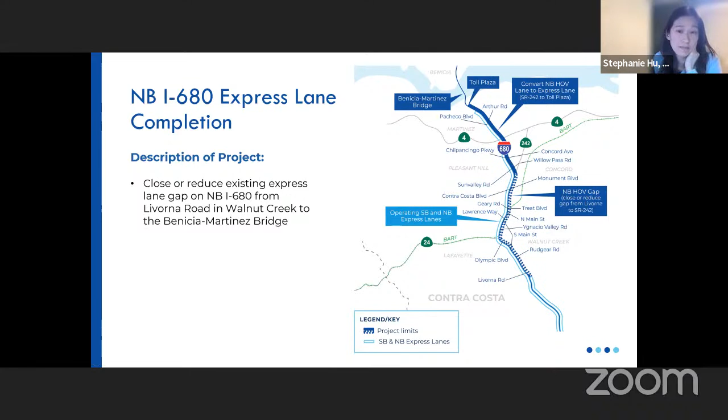Currently the project is in the environmental clearance phase. The purpose of the project is to reduce congestion and delay on 680 northbound during peak periods, improve travel time reliability along the corridor, encourage users to use the HOV lane and transit, optimize the use of existing HOV lane capacity, and provide efficient travel options for vehicles, both carpool and non-carpool.

The project aims to address the need for congestion relief, where delays can often reach up to 30 minutes in the PM peak period while traveling from one end of the county to another. The project also addresses the gap we currently have in the managed lane or express lane system. Lastly, it addresses operational deficiencies on the corridor, such as weaving issues in the area around Lawrence and Treat, which regularly cause backups to the 24 interchange.

I'm going to provide an overview of our alternatives, but before we dive in, I wanted to highlight a few key design features or elements of the proposed project as shown on the slide. Each of the alternatives I'll go over will have some combination of these design features.

The first design element is the realignment of southbound 680 in the vicinity of the 680 and SR 24 interchange. In the Ignacio Valley Boulevard area, there is a BART structure that goes over 680 with columns on the roadway. This structure and its columns have always presented a challenge for fitting in a continuous northbound express lane through that area, and the realignment of southbound 680 is a solution to that challenge. The second feature is this existing HOV conversion to express lane.

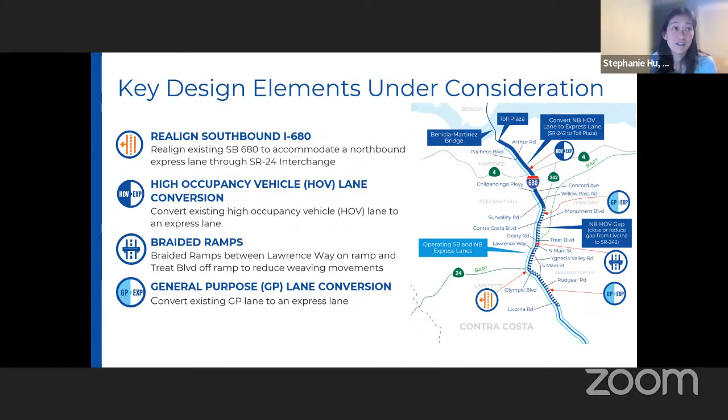The fourth key element is the general purpose lane conversion, which converts an existing general purpose lane to an express lane. We're currently studying four build alternatives, and each has some combination of the key features we just went over.

Alt 1C is the close express lane gap alternative. This alternative includes realignment of the southbound 680 roadway in order to fit in that continuous northbound express lane through the 680-24 interchange and through the area of the BART structure. This alternative, and all build alternatives, include converting the existing HOV lane between 242 and the toll plaza, shown in that dark blue line up top. That blue dotted or solid line is common to all alternatives.

Alt 2 is the reduce the gap alternative with braided ramps. This alternative does not totally complete the express lane system in the northbound direction; it actually leaves a gap in the vicinity of the 680-24 interchange. This alternative includes the operational improvements of the braided ramps at Lawrence and Treat.

Alt 3 is essentially alternative 1C plus alternative 2, closing the gap with braided ramps. Alt 5 proposes to reduce the express lane gap by converting a general purpose lane to an express lane, and also includes the braided ramp element.

Lastly, there is a no-build alternative as part of our required study, meaning we would maintain the existing conditions. If you're wondering why there's no Alt 4, or why the numbering seems funky, it's because we eliminated some alternatives that are no longer viable, which is why there's some skipping of numbers.

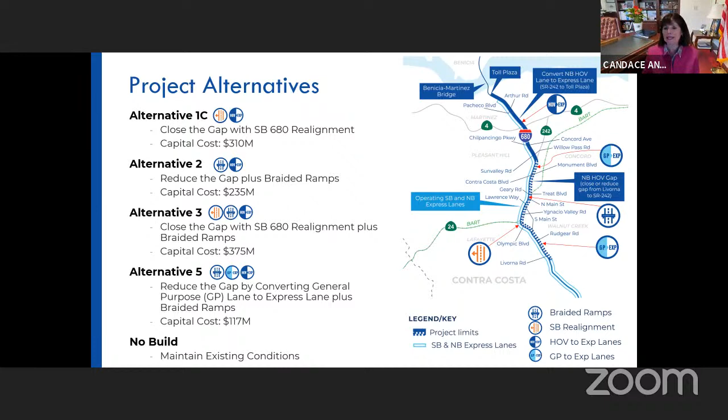Okay, so I'm going to give a short snippet of each alternative. I know we talked a lot about the overall picture, but I'm hoping to go one by one to give you a better understanding of each at a high level.

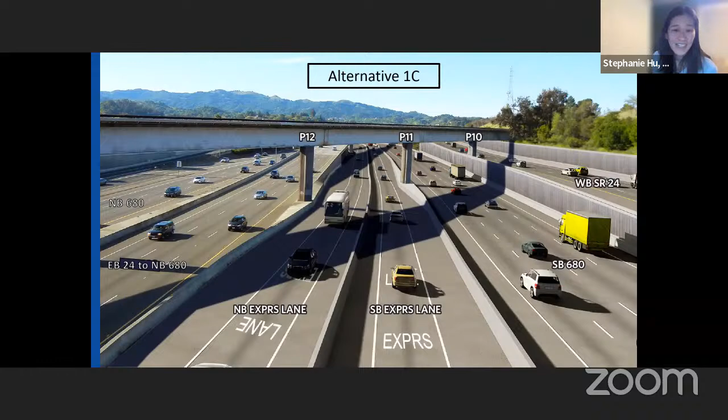Existing and 1C. So if there is another visual aid here with a simulation, I'm hoping to show to convey what we're trying to do here in this alternative.

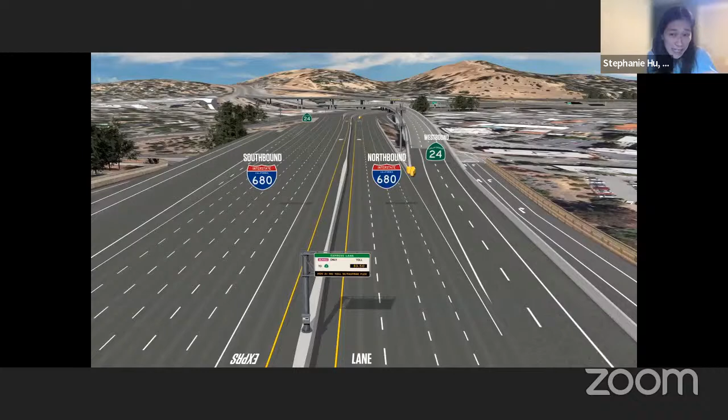The simulation will begin by flying down onto northbound 680 near the westbound 24 off-ramp. It shows us in the driver's seat. The new express lanes will start shifting to the left, but we'll continue on this express lane, and it kind of exits.

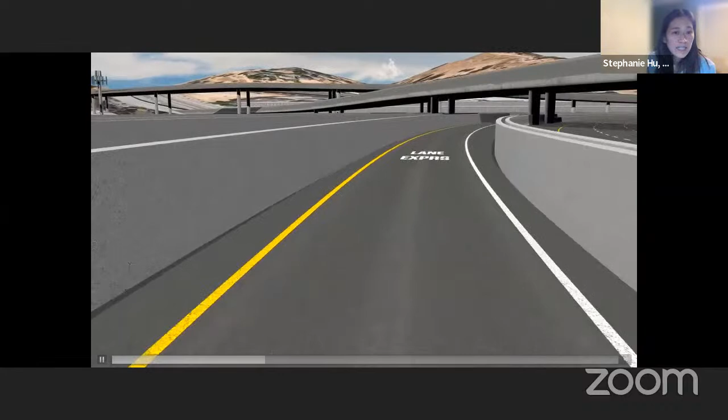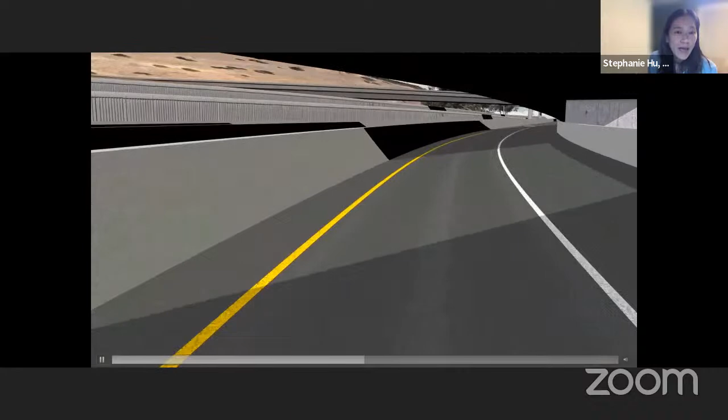We will soon drive underneath, going under the existing westbound 24 flyover structure. We also drive under the eastbound 24 Ignacio Valley Boulevard off-ramp and this merge of eastbound 24.

On our left here, we'll look over - that is the southbound express lane next to us. Soon this camera view will turn 180 degrees, and you'll see the southbound 680 roadway, westbound 24, and then we're looking towards the south again.

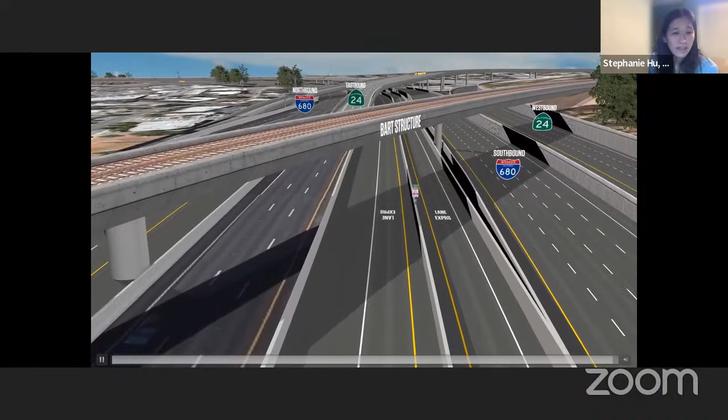So that's Alt 1 in the 24 interchange area.

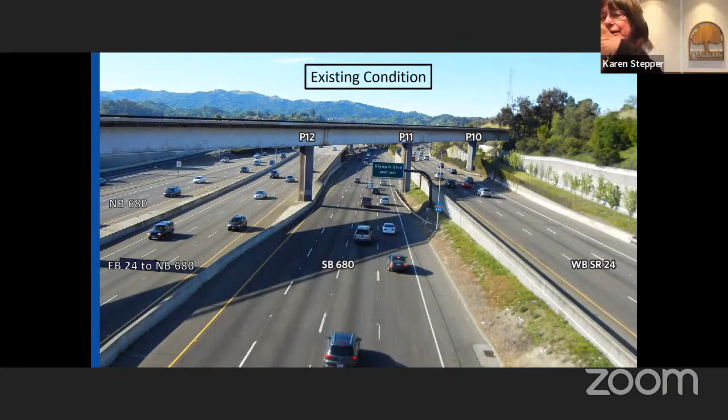Stephanie, can you talk about the exits? Have you changed the exit from North Main? When you come northbound on 680 and you go right towards the main road, you can get off at North Main Street - is that still there?

So yeah, where it kind of shifts is where Ignacio Valley Road is. North of Ignacio Valley, the exits shouldn't change.

And the other question I had is that tiny little yellow part - does that mean widening? Yeah, just taking over to the right-hand side to create room for the lanes.

So people will either get off there at 24 or they'll just keep going. The lane the way you exit remains the same - it's just that we needed to create a little widening to accommodate the space needed.

Thank you. Stephanie, where does the express lane - where do you get on it and where do you get off it? What exits are you not able to get off of if you get on the express lane? You're talking about buffers, I'm assuming, like where the buffers are?

So if you get in that express lane you were showing us, obviously it would be pretty hard to get off at some of these exits. Correct, yeah. So which exits do you have to - can you not get off of, if you get onto the express lane?

Will you be stuck? Well, I'm likely assuming I'm not able to get off in Pleasant Hill anywhere. Yeah, well, I think that's something we need to look at.

Buffers are not finalized. Generally that is done during the PS&E phase where we work with MTC, because there's also pricing and tolling that goes along with that. So I can't unfortunately give you the extent, like from here to here, that's when you can get in or out. That's still to be worked out.

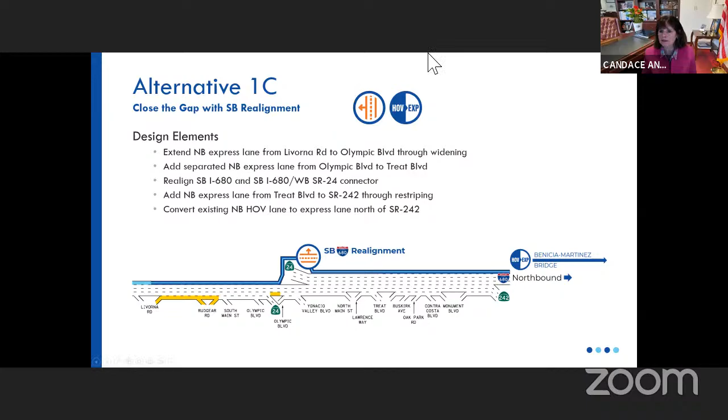Raquel, I see your hand up as a member of the public. Did you have a question about this proposal? Yeah, I'm not sure if it was left from - or is it left over from her original question? Yeah, I felt like it was there on the corner of my screen. Oh, no, yes, I do have a question - I took her hand. Yeah, I lowered her hand, but I just unmuted her.

Oh, okay, thank you. As to that proposal, it just looks like it's taking more space just to accommodate some express lanes. I want to know if there has been a study for the end user on how they feel and their experience with these express lanes, because I commute all the time and I talk to commuters and they hate the express lanes, because it's accommodating one express lane for a few people and congesting the other lanes.

And this proposal on the lane to veer off to 24, you're having two express lanes with a wide range to get the buffers and the side strips where you can accommodate two other lanes that are not express. It just feels like a long stretch of wasted space just to put in that express lane. I don't agree with it.

I think it needs more study. I think we really need the end user, the taxpayers who are actually paying out of their hard-earned money to pay for the roads. I think we need something more efficient. I want to know how, as a resident, I can discuss this with my neighbors and people who actually use these roads, so that they're the ones who are going to benefit or suffer from these consequences that are very permanent.

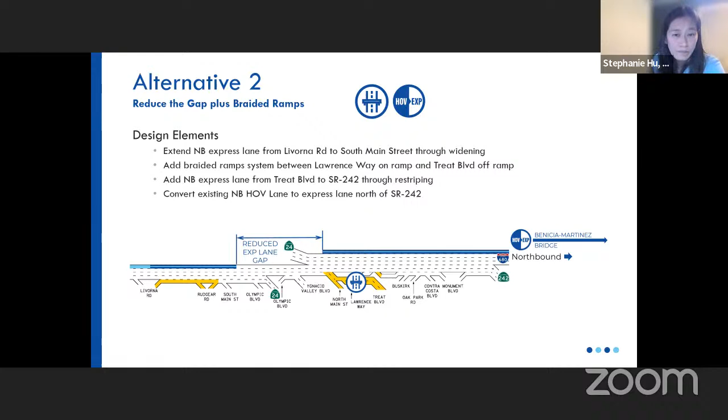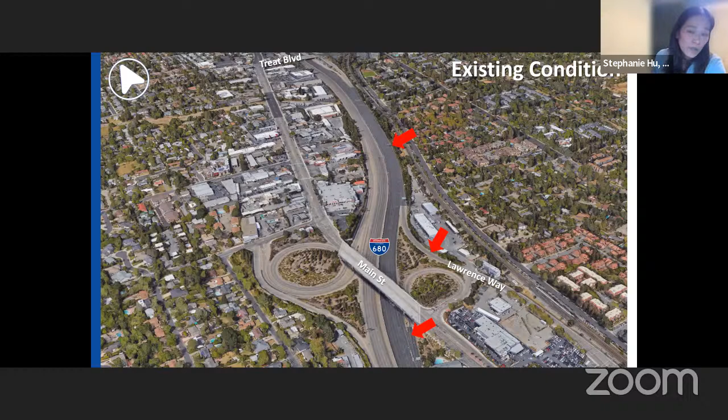And there is a visual of what the situation looks like right now. This is the Lawrence and Treat area, and we're looking north. This is the North Main Street loop off ramp that currently exists. The ramp here is the Lawrence Way on-ramp. And this is that weaving bottleneck area where vehicles are exiting to Treat and mixing with those trying to get on 680. That's the weaving area that we're trying to address.

And now there's a simulation of how that looks. So we're looking north, and this is North Main Street over 680, and Lawrence Way is on our right. Different from the existing condition, those wanting to exit Treat will exit at North Main on this loop ramp. Cars wanting to go to North Main will stay on that loop. But those wanting to go to Treat will go straight on this ramp, which is elevated in order to have Lawrence go underneath Treat, thereby separating those movements. Those exiting Lawrence won't be joining or weaving with those trying to exit at Treat. So this is the braided ramps that I was trying to convey in words, but hopefully this is more clear.

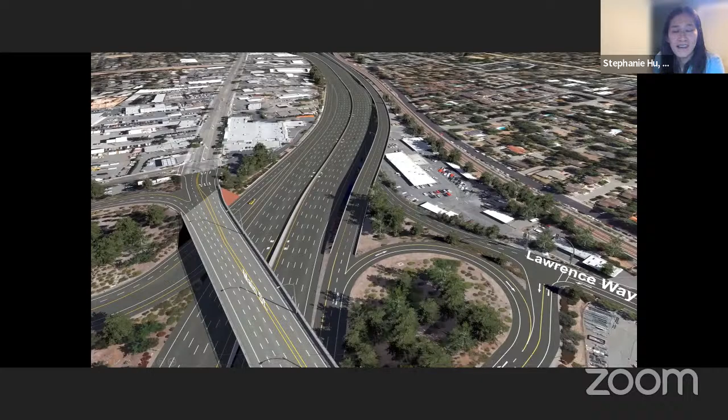Committee member Stepper: Yeah, these are very helpful, Stephanie. Thank you, hopefully, I know it was a lot in words earlier. So this is the operational improvement I was talking about to really alleviate this weaving movement and the bottleneck issue that is currently going on in this area, which often spills back to 24 and even further back.

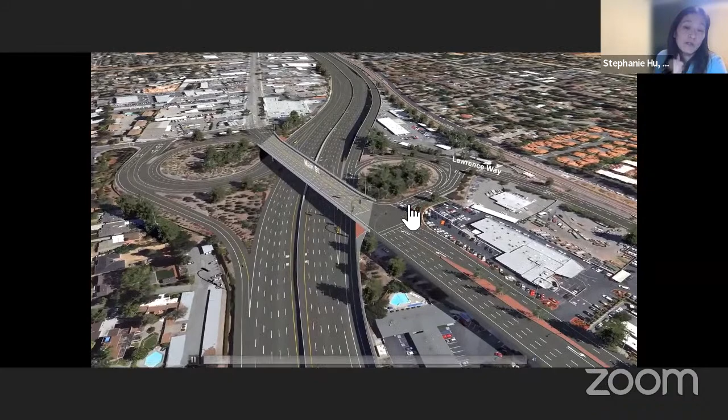So Alt 3 is basically Alt 1 plus Alt 2 together. It closes the gap with that southbound realignment we talked about. It has the braided ramps in Treat and Lawrence. And then north of 242 is when you convert the HOV to express.

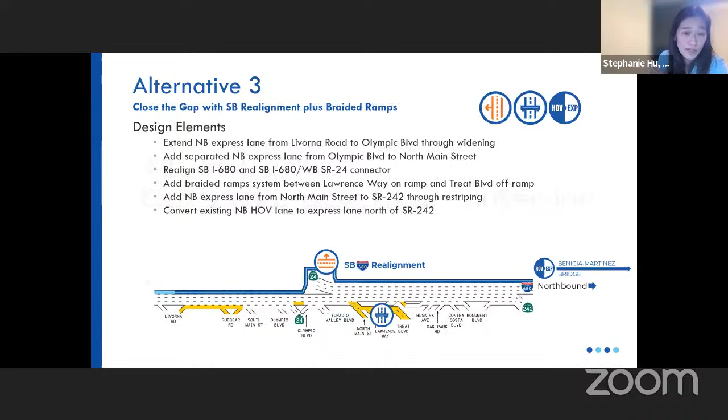The fourth build alternative, or the last one, is Alt 5, which includes taking a general purpose lane and converting it to an express lane. Here's that strip map again.

Alt 5 reduces the gap with the express lane installed through the conversion of existing general purpose lane. So first, instead of from Livorna to South Main, instead of widening, we will convert the general purpose lane to an express lane from Livorna to about South Main. We'll leave a gap between South Main to about North Main.

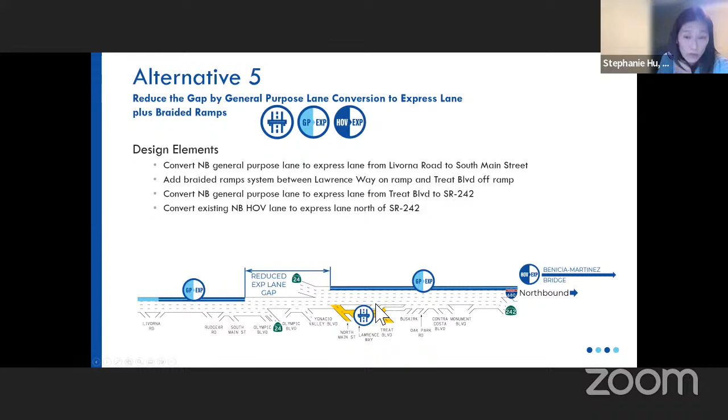And then this alternative has that operational improvement feature of the braided ramps at Lawrence and Treat. And then from Treat to 242, we would have a new express lane, but that would be through converting an existing general purpose lane. And north of 242 is the same as the other alternatives.

So here's a summary of all the alternatives stacked together with all the maps. So 1C closes the gap with southbound realignment. Alt 2 reduces the gap with the braided ramps. Alt 3 is basically 1 and 2 combined, closing the gap with braided ramps.

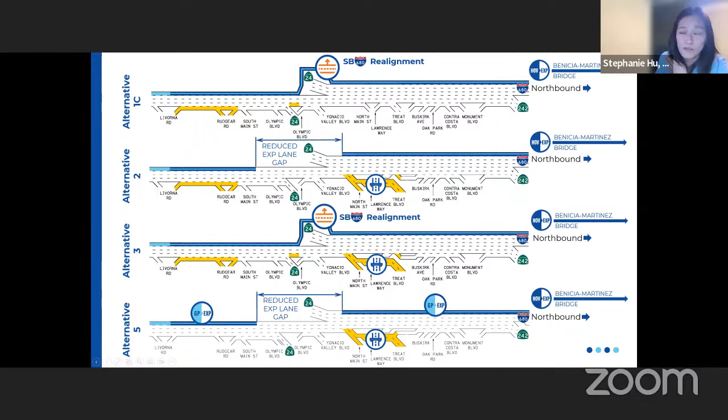Alt 5 reduces the gap, but really by converting GP lanes, or general purpose lane, in various segments, and also it has the braided ramps. And then again, all four alternatives are the same north of 242, converting that existing HOV to express.

Here's a summary of the capital costs for all the alternatives, which ranges from 117 million to 375 million. The least expensive being Alt 5 because it has fewer elements, really, because we're converting existing general purpose lanes. Alt 3 is the most expensive, which closes the gap and also has the braided ramps.

Maybe I'll pause here to take some questions. Why don't we pause here just to see if there's any more before we jump into our vehicle miles traveled discussion. Does anyone have any questions about what's been presented, the capital cost?

You're not asking us to choose which one we like best tonight. You're just showing where we're going and what we're studying. Okay, I am not seeing any. Oh, Karen, you've got your hand up. Yes. I'm sorry, I can't even see myself on my own screen the way this. Well, we can see you, so that's good.

So it's just that I do have concerns with the last alternative, which is taking more lane and converting it, because it's going to affect the number of exits. But I mean, we're going to see more in the future about this issue. But whereas the first three did a lot of good things that I could see. So I'm not picking one. I'm just telling you the last one, where we're converting, is also compounding sometimes the resistance to what we're doing.

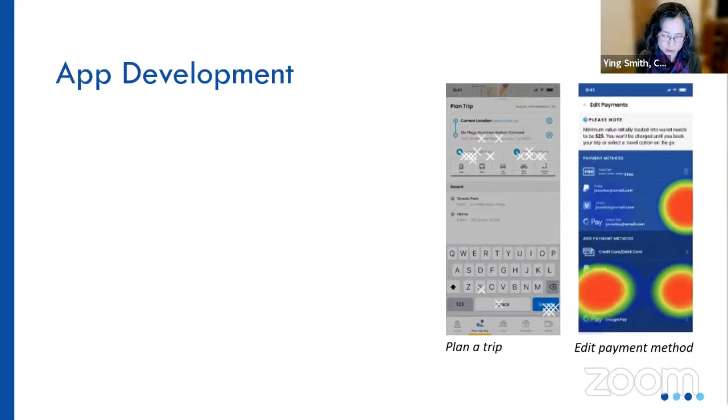A little bit on the app development. The project team has worked really hard coordinating with different agencies and vendors. There are several steps in development and testing, and we are more than 90% there. We did alpha testing in January 2022, testing the user stories.

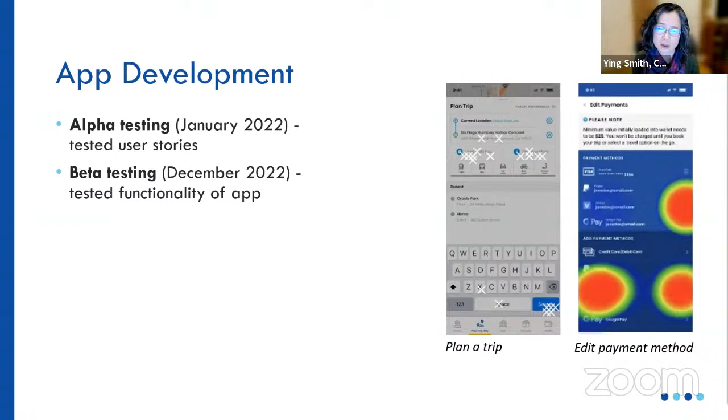Beta testing was just completed at the end of last year, allowing us to test the functionality of the app. We're working toward the pilot testing phase coming up soon in spring, which will allow us to test functionality in the production environment. The screenshot on the right shows the app interface, which came from the beta testing phase.

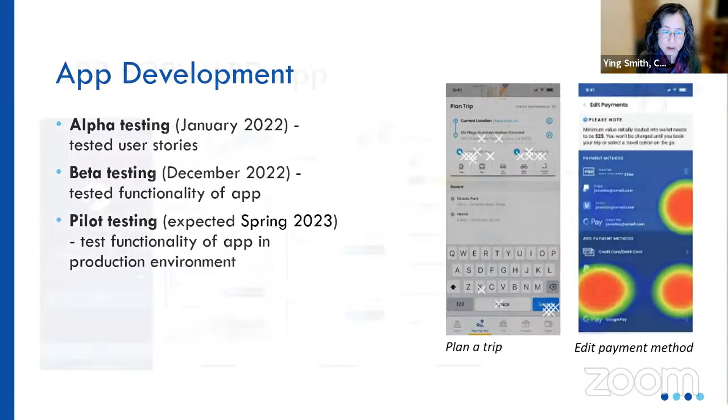We brand the app as 680 Forward, and there's a bit more detail, with more screenshots of the interface. First, the trip planning platform and services form the backbone of the app.

There are two micro mobility options, Hopper and Bird, both integrated into the service to allow users to get to them in standard mode. There's a car share option allowing people to travel between Martinez and San Ramon. The County Connection service is integrated into the app along the 680 corridor. There's also car share and TNC options, all provided through the deep link.

The very interesting piece is the incentive program. This will be provided on the Miles platform, tracking people's trips, and they earn rewards to use more—like if they use bike share more, they earn points to use back in the app environment.

Shifting gears, I want to talk about the shuttle. This SAV started as a scheduled route in Bishop Ranch Business Park. In a future app upgrade, it will have better functionality including ride hailing, skip stop, and flexible routing, and will be branded as Presto shuttles—I'm learning this new name. The SAV will be implemented in Bishop Ranch Business Park, and we're working toward a March launch, with the pilot period lasting about 8 months.

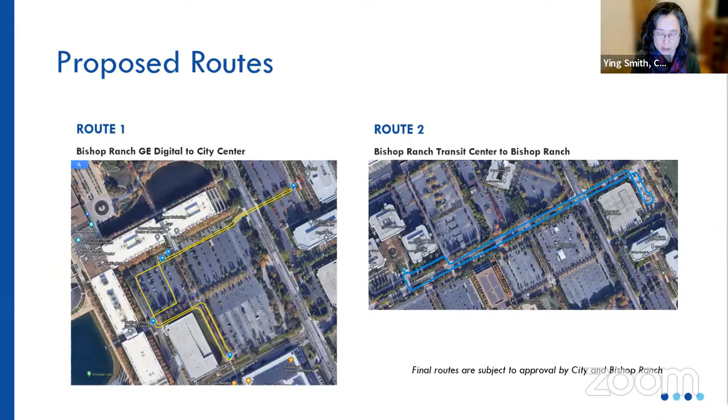Okay, anyone have any questions? I am not seeing any from committee members. Do we have any written public comment, Terry Ann? No written public comment, and I am not seeing anyone from the public with their hands raised as well. No public comment. Okay, great.

Thank you very much for that. Now we are going to see if there are any additional policy advisory committee feedback comments. I think we're at that point right now. This is an opportunity to provide any feedback or comments on a future agenda.

One thing I have brought up is that this is the 12th meeting I think I've chaired, and I'm just wondering if someone else would like to be chair. We have a vice chair, Sue. I'm very happy to have someone take over, and I'm not one of those eternal rulers claiming this throne. So Sue, what is the pleasure of the committee?

I am happy to do it. I was about to say, I'm happy to do whatever the committee would like. I have no problem either way.

I'm happy with the consistency we have right now with you, Candace, continuing to do it. I'm fine if Sue wants to do it, but I think you're doing a great job, Candace. Well, I'm not asking for you to praise me, I just want to know if you want to change it like we normally do. I got it. I'm of the opinion, if it ain't broke, don't fix it.